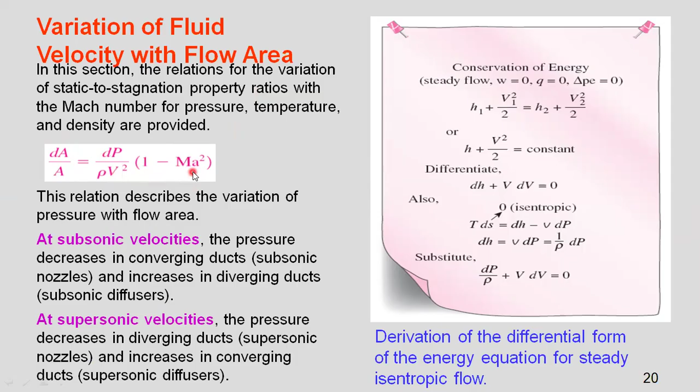So that was the reason. Okay, now what we have done is, after getting these differential equations, we have analyzed different ducts like converging, diverging, etc., in terms of area, that is converging or diverging, and in terms of Mach number, whether it is supersonic or subsonic, what will happen for subsonic flow and what will happen for supersonic flow. Okay.

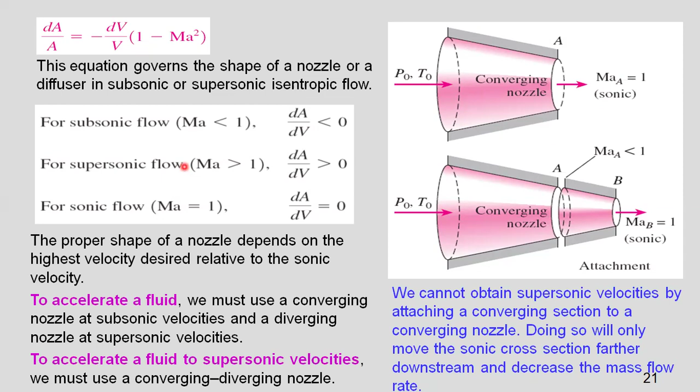Next, we went on from the differential equation. We constructed the integrated form of the differential equation and solved those, and we solved for one-dimensional isentropic flow for a nozzle. And before that, we also got the thermodynamic relations, that means how the pressure, velocity, Mach number, temperature, density, etc. will vary for different situations.

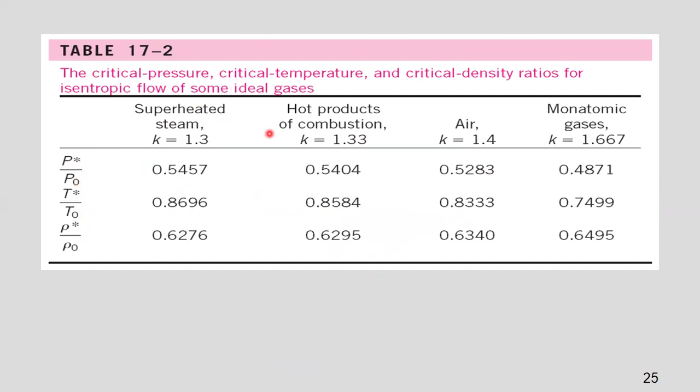And another thing that I told is that it is not always true that at the throat there will always be sonic condition. But the reverse is true, that if there is sonic condition, that will always be at the throat. Okay. So critical properties and critical property ratios in terms of isentropic coefficient. This is a fixed thing for a particular gas, when we consider the constant value of the isentropic index. So we have tabulated these ratios for some standard materials like steam, superheated steam, combustion product, air, monatomic gas, etc.

Okay. So now, what was our target? To discuss how to get maximum velocity, right? Now we had seen in the last class that for an isentropic flow through a convergent nozzle, starting from the stagnation properties, the maximum velocity that we can reach at the throat is the sonic velocity. And if we try to reduce the pressure for increasing the velocity further, there will not be any increase in the velocity, and the pressure at the exit will be the critical pressure, that is P star. The back pressure may be further reduced, but the pressure at the exit of the nozzle will remain as the critical pressure.

And the pressure variation throughout the length of the nozzle will remain as it is. After this condition is reached, the flow is called choked flow, because after that the flow condition does not change. We cannot change the mass flow rate any further. If we try to increase the length of the nozzle and the exit area is further reduced, then the opposite thing will happen, because the velocity will remain the same at the exit, but the mass flow rate will reduce because of the lower area.

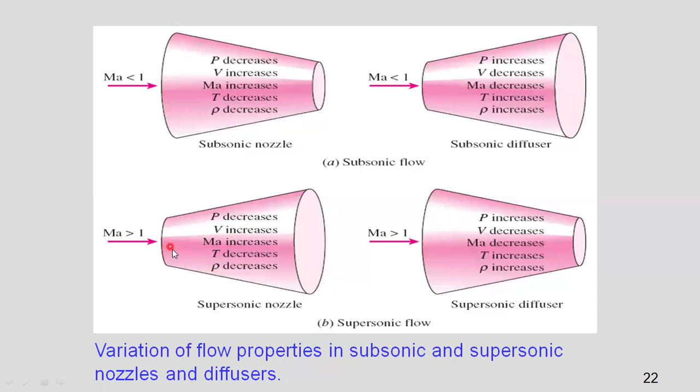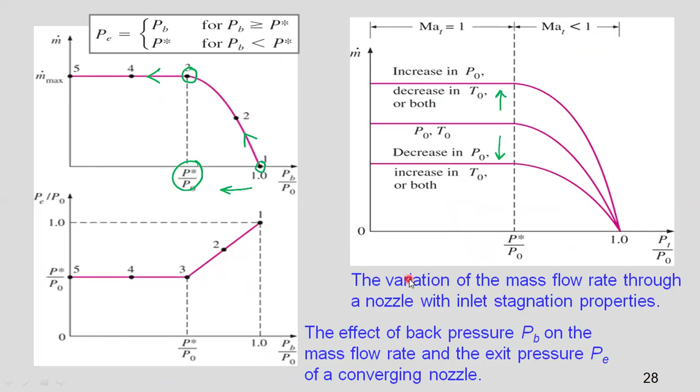So in the convergent part, it will be basically reaching up to sonic, and in the divergent part, it will take it beyond the sonic and it will make it supersonic. Okay. Next, what we will do is, we will calculate. So this part we have seen. Up to this we had seen in the last class.

I will discuss how to get that from this. That means we assume that Mach number is equal to 1. That is the condition for maximum mass flow rate. And we had just put Mach number is equal to 1 here and got this m dot max. In a separate lecture, I will give the calculation. I will attach that lecture with the earlier class and you will get it. This is simply one differentiation and some rearrangement, and it will easily come that for Mach number equal to 1, we will get it.

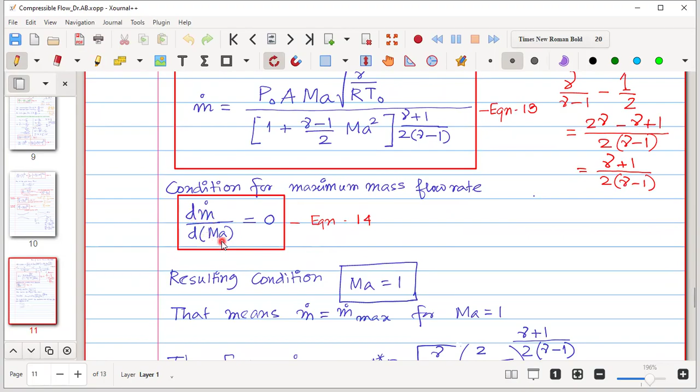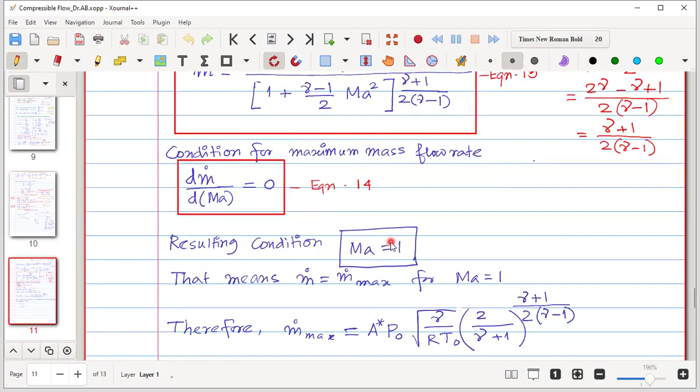So here basically, this is the mass flow rate. Now the condition for maximum mass flow rate will be dm dot/dMa is equal to 0. And from that, we will get Ma is equal to 1. So that can be easily shown. I will show it. So next.

Next, before going for the convergent divergent nozzle, I will just show another calculation where basically, we have already calculated m dot max. What is that m dot max? This one. Now, what is A star? A star is basically the area at the throat. And all other quantities that you see are simply gamma, R, T0, P0. So this is the maximum mass flow rate for a given area at the throat.

So throat means what? Can you tell what is the throat here? Sir, at the end area. Exactly. Throat here, it is a convergent nozzle, so throat means the exit. So this is the exit area. You see that. This is the convergent nozzle and throat means it is the exit. So that is the area at the exit. Very good.

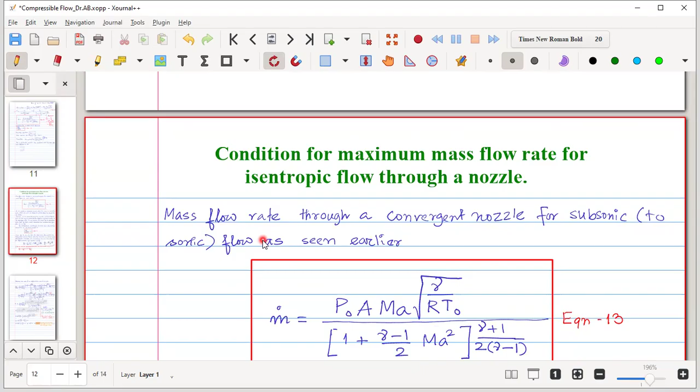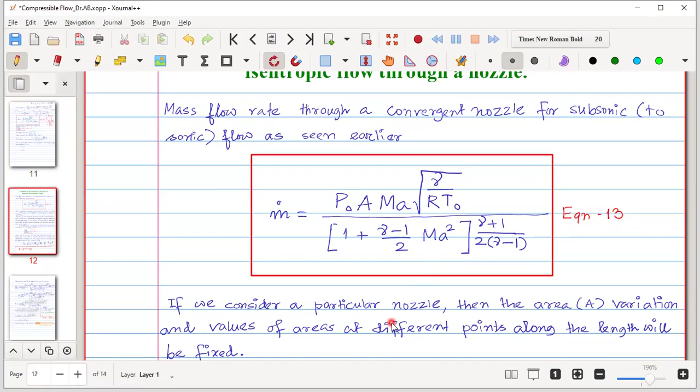Okay. Now what we want to do is basically a relation for the variation of the flow area through the nozzle. So for a variation of the flow area, now we want to calculate a relation of variation of the flow area. That means how the flow area varies. So basically, we now want to design that area.

Try to understand that. So far whatever we have done is calculated the maximum velocity. We have also calculated a general expression for velocity and a general expression for mass flow rate. This is the general expression for mass flow rate, and this is the expression for maximum mass flow rate at the exit. That means A star is the area at the exit, and A is the area at any point.

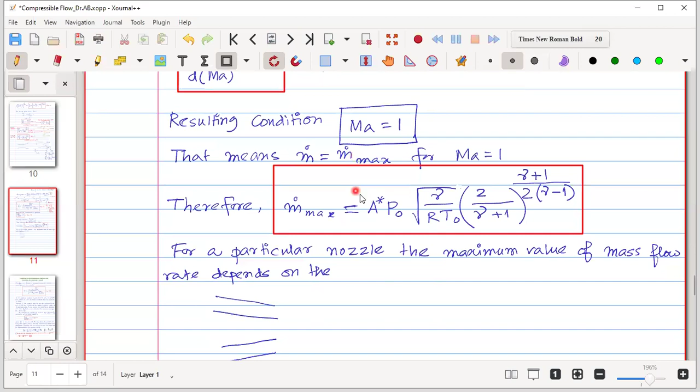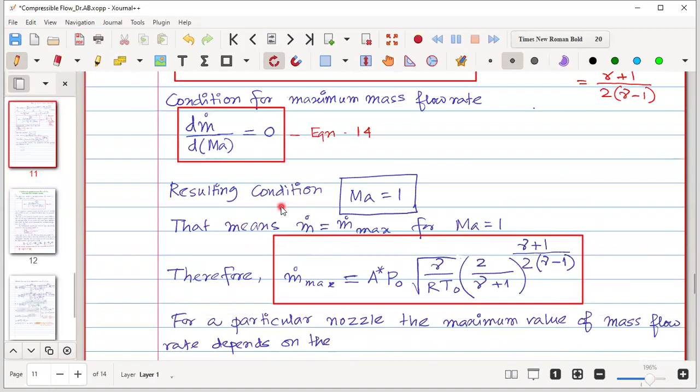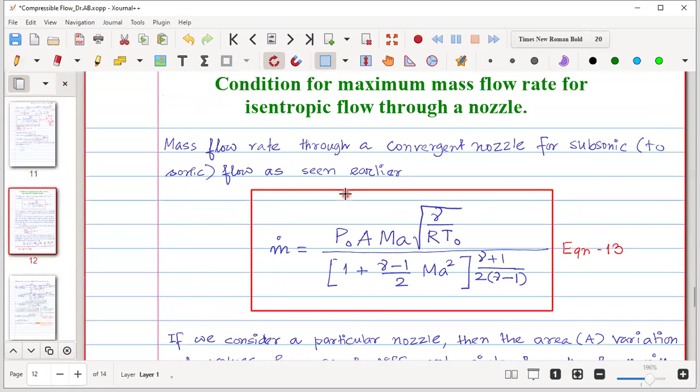Okay. Let me show. Now, therefore, if we just equate these two, that means m dot max is equal to m dot, then we can write, let us see. So m dot is equal to m dot max. Therefore, we can write that, let us copy that. M dot is equal to this one, m dot max is equal to this one. So m dot max is equal to this one.

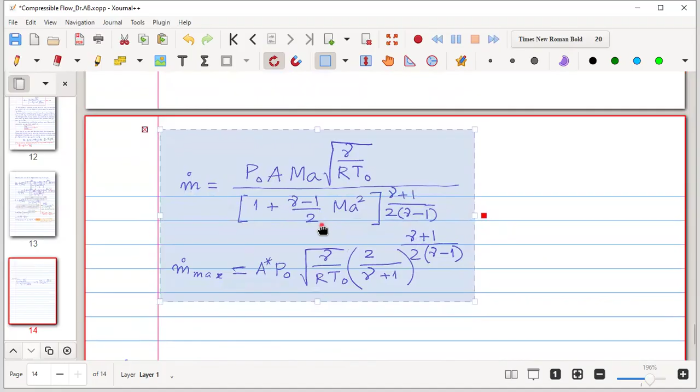Therefore, if we just equate them, then we will get this is equal to this. This is equal to this. Okay. So that implies, therefore, m dot is equal to m dot max.

We want to express the variable area with location, you can say, and Mach number, in terms of A star, that is the area at the throat. Area at the throat.

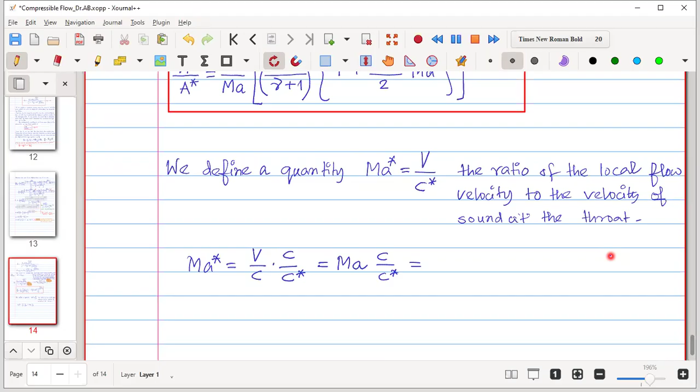Okay. So if we write Mach number star, M star is equal to V by C star, I can write it as V by C multiplied by C by C star. Now what is V by C? We know it is Mach number. So basically we want to express M star in terms of MA. And this is C by C star. And what is C? For the ideal gas, it is root gamma RT. Now try to understand, this sonic speed depends on what?

During the flow, the temperature is changing. The temperature everywhere is different. So the speed of sound will also change along the flow path, because speed of sound depends on temperature. That means C is the velocity of sound at the local temperature, at some point here, and C star is the velocity of sound at the throat condition. Okay, is it clear?

Yes, sir. So if C is equal to under root gamma RT, then what will be C star? Can you tell? No, sir. The velocity of sound is under root gamma RT in terms of temperature. The temperature here is T. What is the temperature here at the exit? Sir, temperature rises. Is the temperature rising? No, you are mistaking. Pressure is decreasing and temperature is also decreasing. Exactly. Because velocity is increasing, pressure will fall and temperature will also fall.

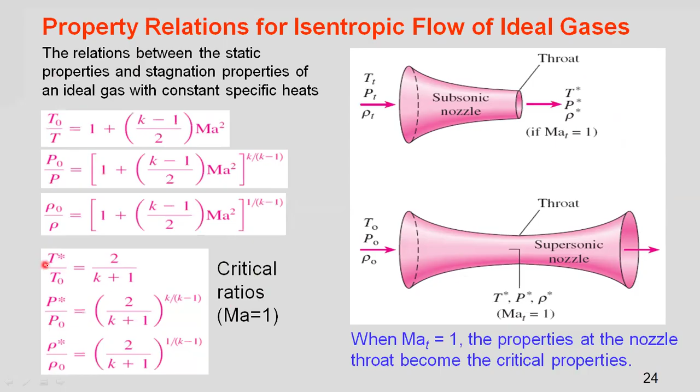So what is the condition here at the throat for maximum mass flow rate? At the exit, what is the condition? Sir, mass flow rate will be equal, and A star will be greater. Mass flow rate will be equal, obviously. My question is, for the maximum mass flow rate, when the Mach number is equal to 1 at the throat, what is the condition? When Mach number is equal to 1, T becomes T star. Exactly. So that is the critical temperature.

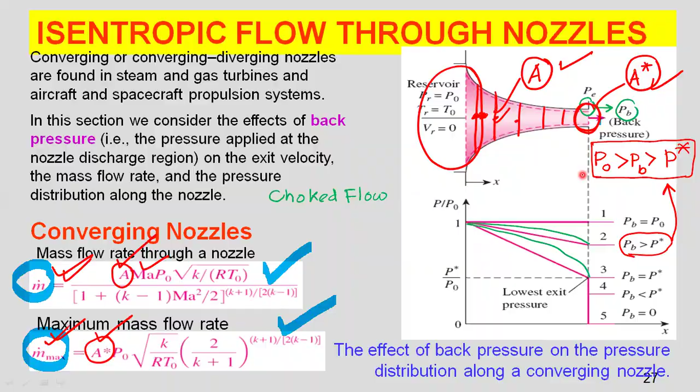So what will be the sonic speed? C star. Temperature you know is T star, so what will be the sonic speed? Sir, root over gamma R T star. Exactly. So it will be under root gamma R T star. Because we know temperature, we can directly relate it. C depends on the material, that is gamma R, and the temperature. Gamma R are the same for this material, and the temperature is changing, so that is T star.

So therefore, we can write this as MA times simply root T by T star. So basically, MA star is equal to MA multiplied by root T by T star.

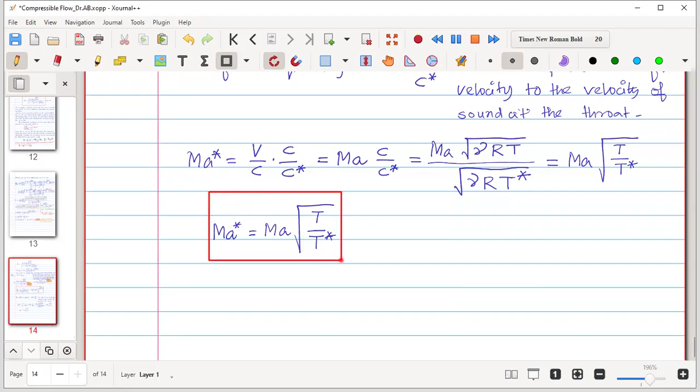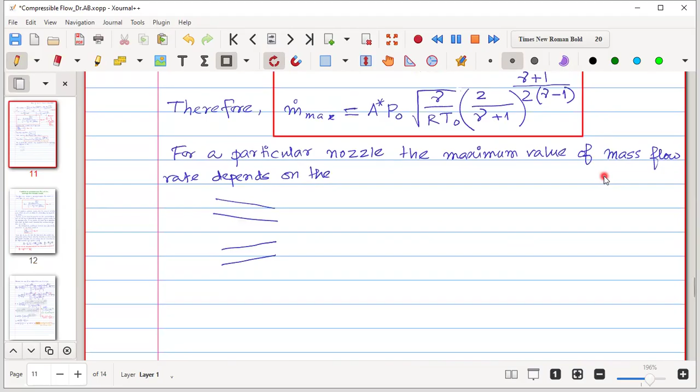Okay. So let us number these equations so that it will be easy for us to follow. Equation 14, m dot max. This is equation 15.

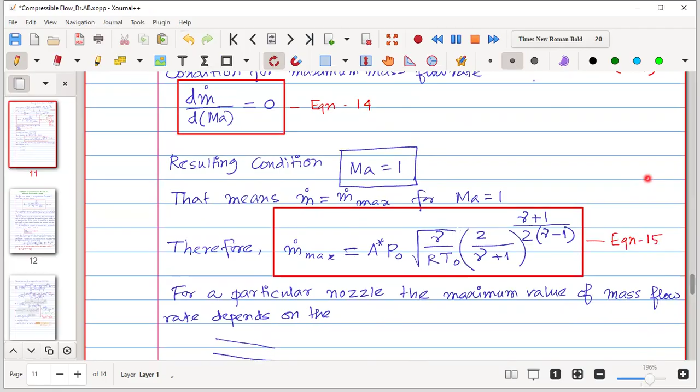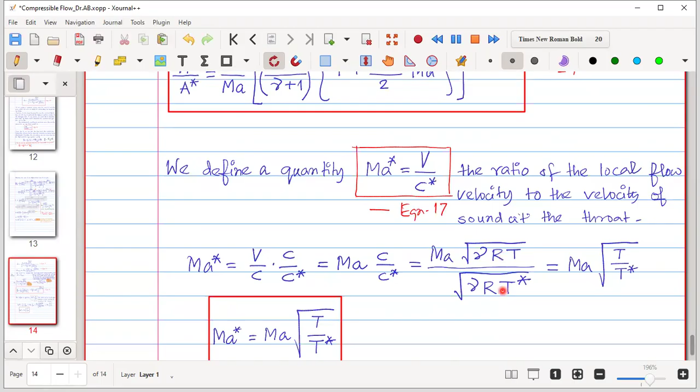So this is equation 14. This is equation 15. And this is equation 16. We have defined this. So this is equation 17. Okay. This is the equation 18.

Okay. Next. Therefore, you see that here we have got MA star in terms of MA. MA is the local Mach number, and the temperature is T, and MA star is the Mach number defined in terms of local velocity to the velocity of sound at the throat.

Okay. Now, here you see how to get it, because we know the relation between T and T star. If we want to get the relation between T and T star, earlier we have got relations between the temperatures. What temperatures? The relation between T star and T0, and also a relation between T and T0. So from this we can eliminate and get T star and T.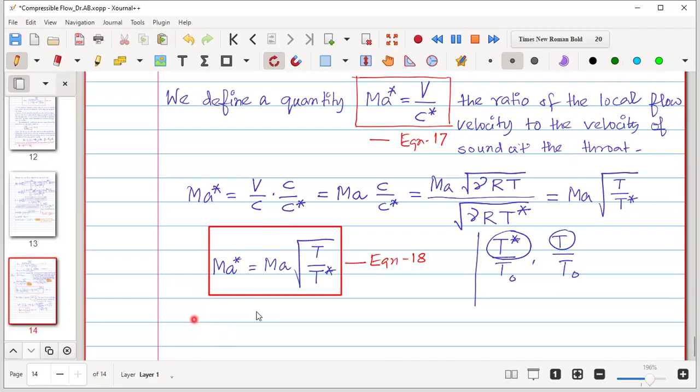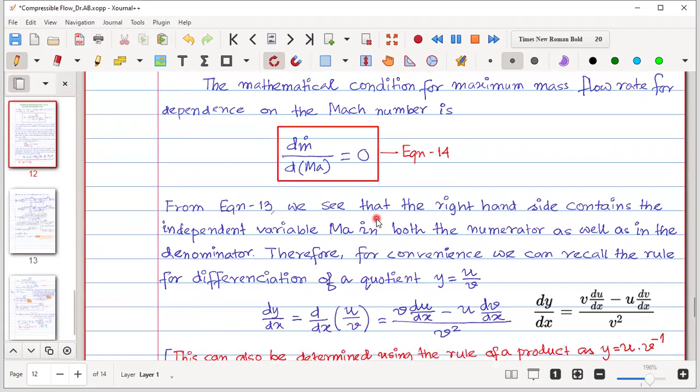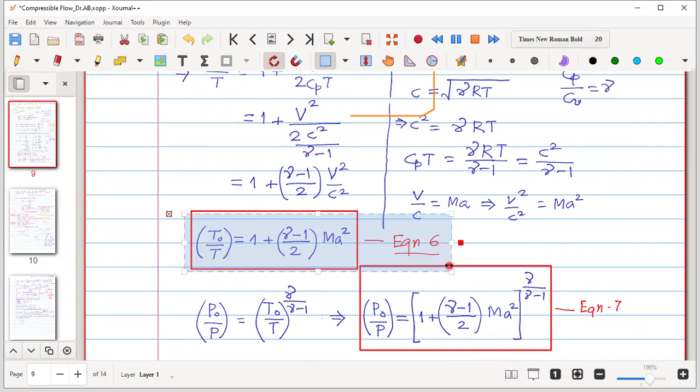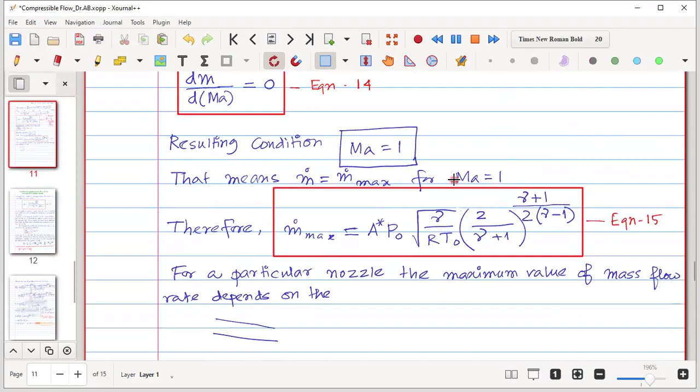Isn't it? So what was the relation? Let us just try to see. One is T0 by T, another is T0 by T star. One is this one, T0 by T star. Another is T0 by T, this one. Okay. So let us just rewrite. This is equation 6. Another is this one, equation 9.

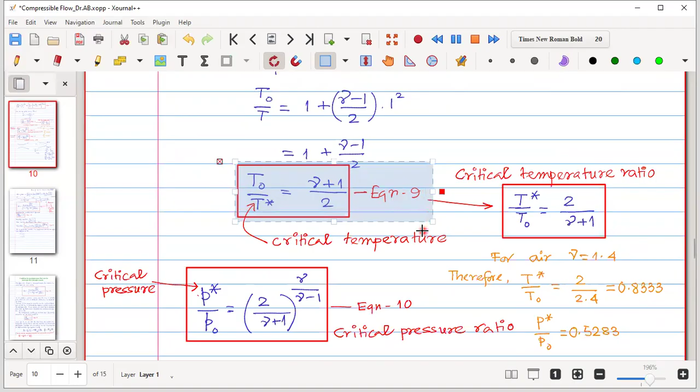So if I divide this by this, what will I get? Basically what I am trying to show you is a T by T star relation. In none of our earlier relations have we got T by T star, but we have got relations in terms of T0 and T and T0 and T star. So if I just divide these, I will get a relation of T and T star. So that is what I'm going to do.

So if I just divide that, what I want to get is T by T star. T by T star equals gamma plus 1 by 2 multiplied by 1 by 1 plus gamma minus 1 by 2 MA square. Okay.

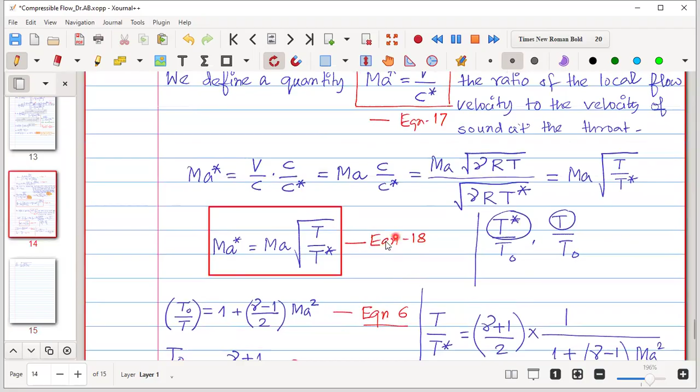So T by T star is equal to gamma plus 1 divided by, if I multiply 2, 2 plus gamma minus 1 MA square. So under root of this is equal to under root of this. So what is the relation between MA star and MA? I can write from equation 18; let us give this a number. After 18, it is 19.

Therefore, from equations 18 and 19, we get MA star is equal to MA multiplied by the root of T by T star, that is, gamma plus 1 divided by 2 plus gamma minus 1 MA square. Okay. So this is equation 20.

Okay. So the values of MA star are given in the tables with the Mach number for a particular fluid, that is for gamma equal to 1.4. We have to understand in which way the parameters MA star and MA are different. So that I have just mentioned. MA is the local fluid velocity to the local sonic velocity, and MA star is the local fluid velocity to the sonic velocity at the throat.

Okay. So we can stop for now today. In the next class, we will discuss the convergent divergent nozzle. Okay.